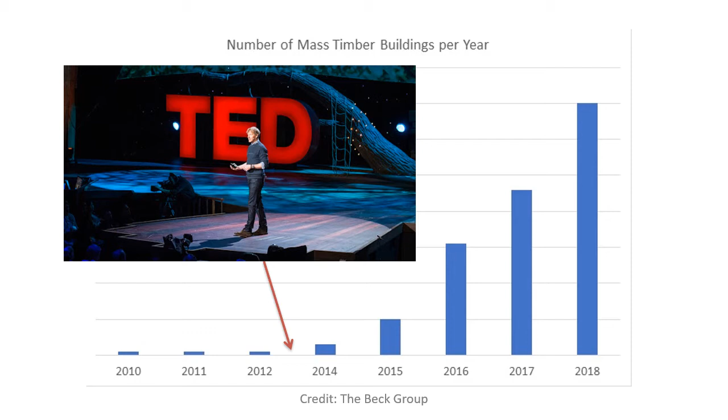Mass timber has been all over the headlines in recent years, and it's not just in design and construction journals either. As a matter of fact, I gave a similar presentation to the structural engineers in Utah in February, and on my way home, on one of my favorite NPR programs, Science Friday, featured mass timber buildings. That one's worth listening to if you get a chance.

The first and most visible reason why people are considering mass timber is the aesthetic. Mass timber has a sort of architectural warmth, or biophilia. Biophilia is the idea that humans possess an innate tendency to seek connection with nature and other forms of life. This seeks to explain why we're drawn to these environments.

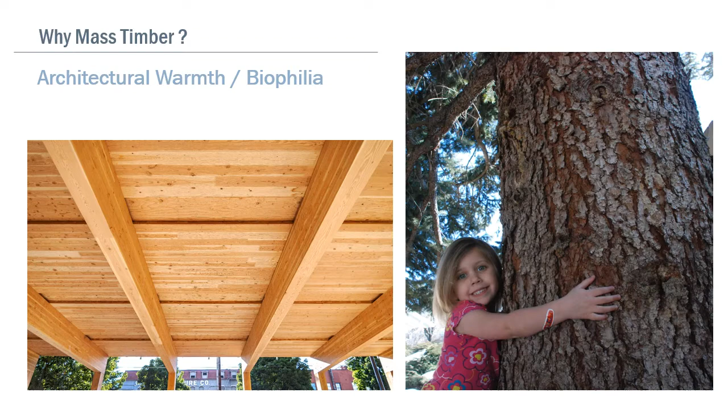For one recent project that we completed, called the Rocky Mountain Institute Innovation Center in Basalt, Colorado, the owner had a vision that this building will create delight when entered, health and productivity when occupied, and regret when departed. To me, this is an inspiring statement, and mass timber was a big part of achieving that goal for that project.

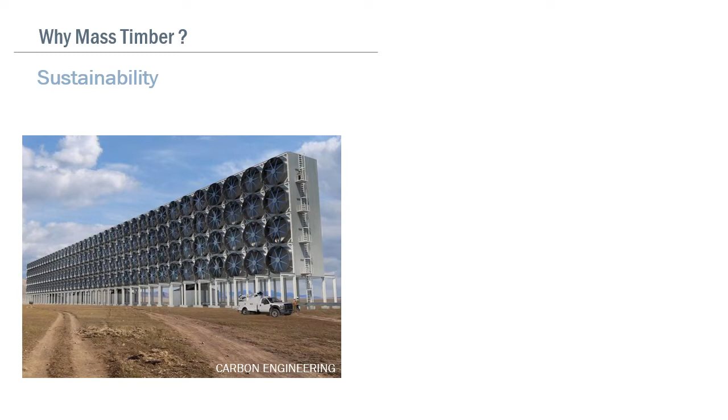Climate scientists have been warning us for decades that too much carbon dioxide in the air will cause global warming. One solution proposed by a company in Canada called Carbon Engineering is a large-scale carbon dioxide removal plant. The image that you see here is a rendering of one of those proposed plants. It turns out that Mother Nature has been creating machines like these for millions of years. They're called trees.

Carbon captured in sustainably harvested trees may be stored or sequestered in our buildings, so it cannot be released back into the air as the tree decays or from wildfires.

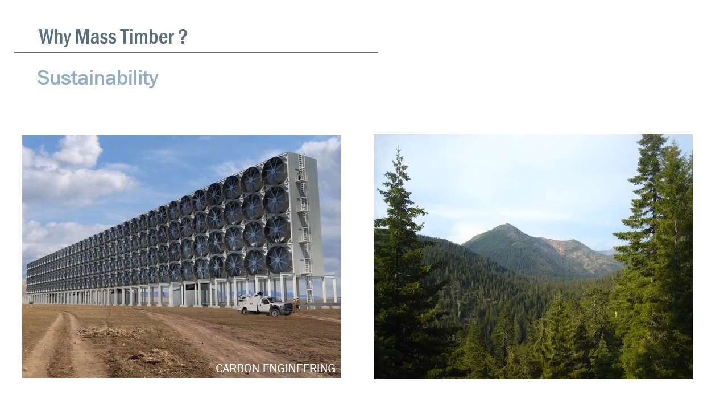Borrowed from the concept of farm to table, mass timber is providing opportunity for rural economic development and connecting the rural economies to the progress of our cities. This is especially true in the Northwest. Similar to the term farm to table, Lever Architecture, one of our partners on some of these projects, has coined the term forest to frame. In addition, in Utah, responsible forest management also has the opportunity to reduce fire risk in our backcountry.

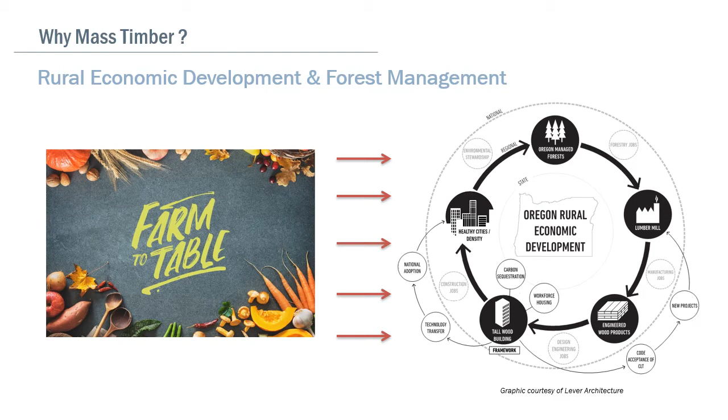One of the last reasons why mass timber is such a hot trend right now is the speed of erection. Mass timber components are prefabricated and CNC'd to allow them to go together really fast.

One example of what's possible is the Brock Commons in British Columbia. This 18-story mass timber student housing project was the tallest mass timber building in the world until recently. Constructed in 2017, the timber floors were erected with a crew of 9. The concrete core and podium took 7 months to construct, and the timber portion was erected in only 2 months. There's a really cool video that shows the time lapse of the construction—Google Brock Commons time lapse. It's really cool to see this in action.

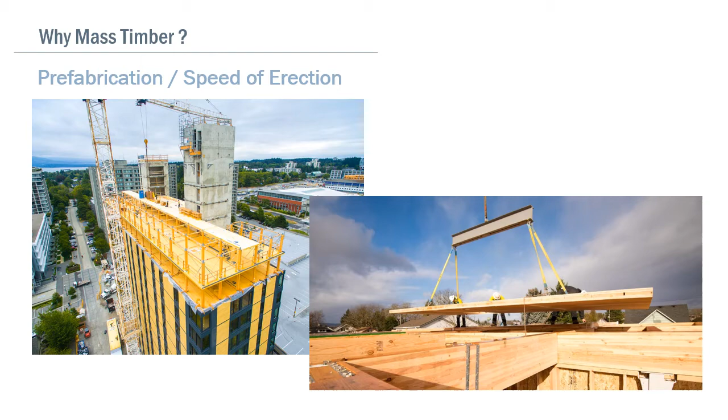So, what is mass timber? Mass timber is not your parents' or even your grandparents' timber construction. Current mass timber is more aligned with the way your great-grandparents built with wood. Up until the middle of the 20th century, many buildings in our cities were constructed with heavy timber post and beam construction. One example of this type of construction is the hardware building on North Temple that you see there on the right.

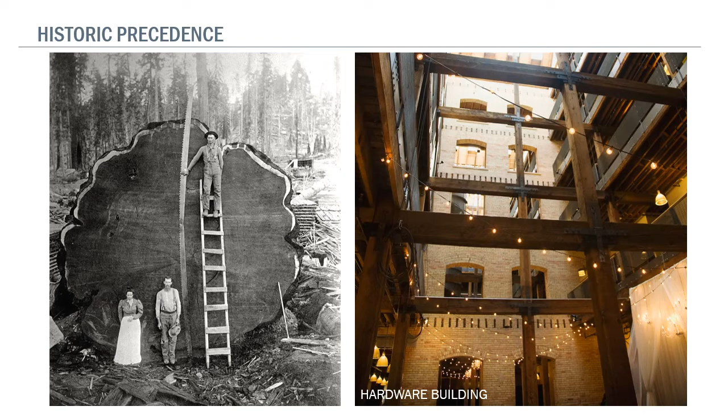Mass timber is not stick frame. It's not a commodity product, and it's not something that you'll go pick up at Home Depot.

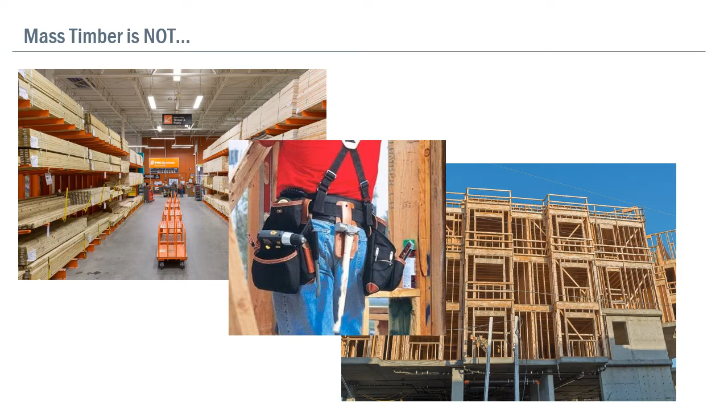Unlike heavy timber buildings in the early 20th century, today's mass timber is not created from old growth, large timbers. Today, the new generation of mass timber buildings are made up from building up large sections with smaller laminations. This allows for more sustainable forestry and procurement of timber.

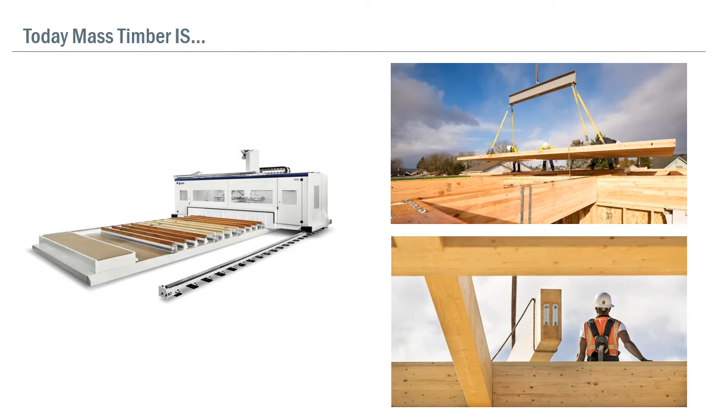Today's mass timber is also highly prefabricated. The image on the left is a CNC machine. Elements are cut, dapped, drilled, routed for connections, and site construction is often more of an assembly of a kit of parts that are delivered to the site.

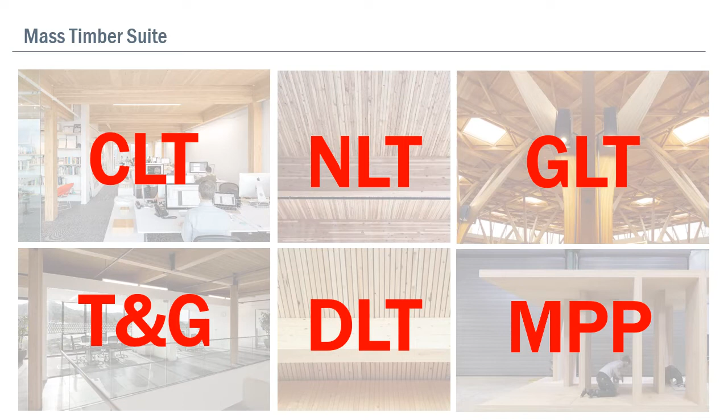There are a few products that have contributed to the mass timber renaissance. Starting in the upper left is CLT, or cross-laminated timber. To the right of that is NLT, or nail laminated timber. GLT is glue laminated timber. T&G is tongue and groove—you're all familiar with that, I'm sure. DLT is dowel laminated timber. And the bottom right is MPP, or mass plywood panel.

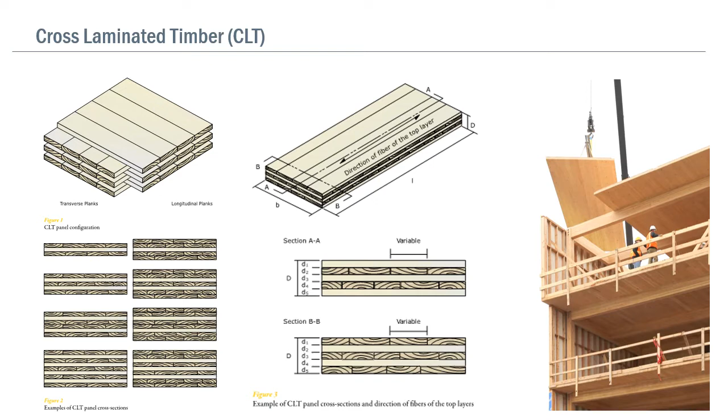Cross-laminated timber, or CLT, was first developed in Germany and Austria in the early 1990s. It's essentially like gluing up glue lam beams, but rather than stacking the laminations in the same direction to create a beam, the laminations are laid up in alternating directions to create large panels. Because CLT is fabricated in alternating layers, it is capable of two-way spans and can also be used as a structural diaphragm or shear wall.

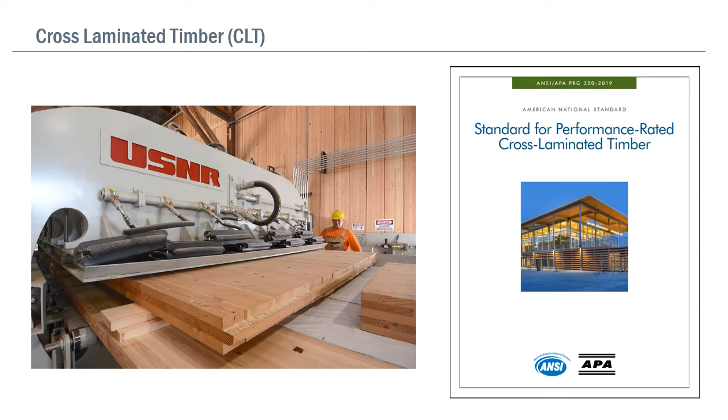NLT is essentially dimensional lumber stacked together and nailed on end. Because all of the lumber spans in the same direction, this is really only capable of a one-way span and cannot be used as a diaphragm.

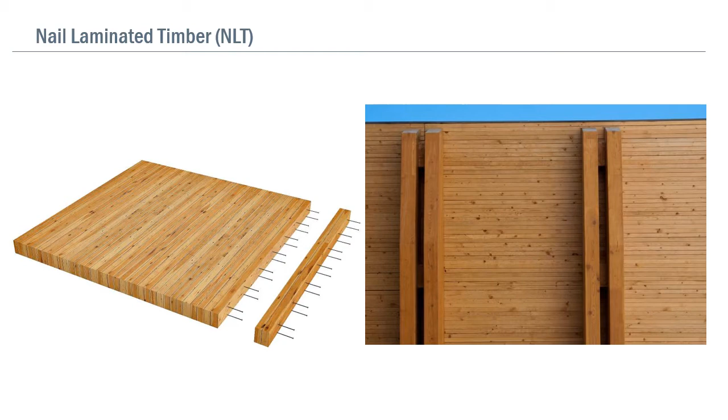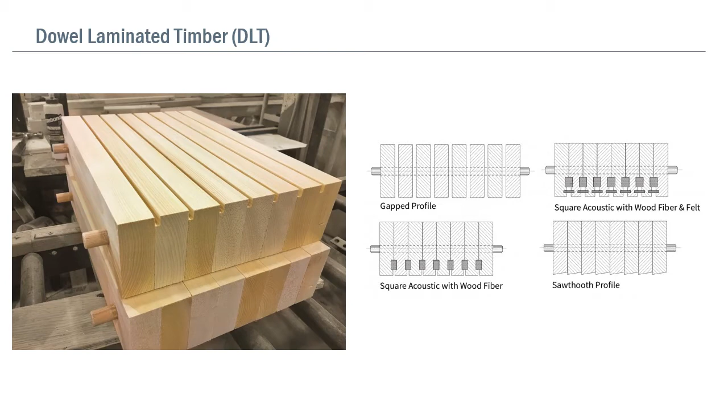An improvement upon the NLT concept is this product called dowel laminated timber, or DLT. It's essentially the same concept, except rather than nails, the laminations are connected together with hardwood dowels. When the hardwood dowels come into contact with the surrounding softwood lumber, they swell and lock these timbers together. DLT is primarily fabricated by one manufacturer in North America, StructureCraft, out of British Columbia. The edges of these can be routed or curved for aesthetics, or even to provide an acoustical treatment.

The last product that I'll mention of the mass timber suite is mass plywood panel, and they're exactly what they sound like—essentially a really thick plywood, up to 12 inches. MPP is fabricated by one mill in Oregon called Freres Lumber, and they began fabricating mass plywood panel in 2017.

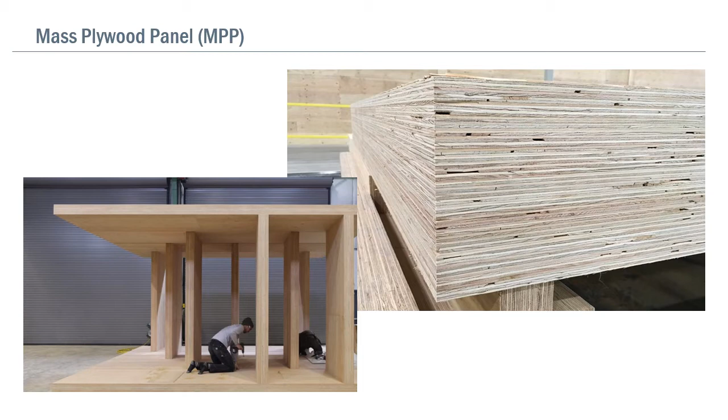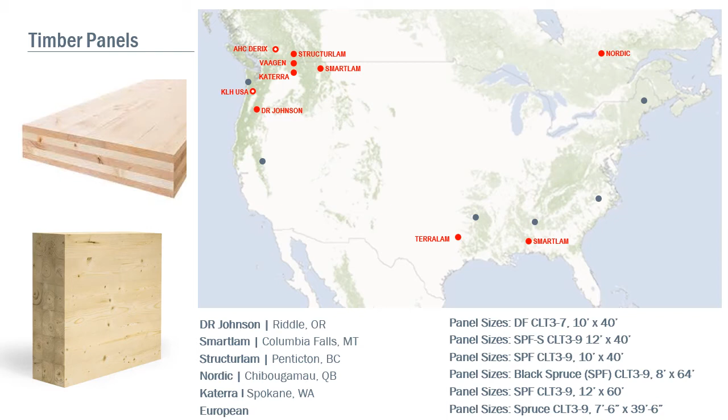Structurlam was the first CLT manufacturer in North America, located in British Columbia. In 2016, D.R. Johnson became the first domestic CLT manufacturer in the United States. In the 4 years since, many CLT manufacturers have opened up, and there's many more in the works. You may also run into European CLT—these manufacturers have distribution centers in North America. One thing to be aware of is that each of these manufacturers fabricate different panel widths, lengths, and thicknesses, so it's important to coordinate your design with them.

As I mentioned, StructureCraft in British Columbia fabricates dowel laminated timber, and Freres Lumber in Oregon fabricates mass plywood panel.

Wood is different than any other building material. We'll discuss a few of the design considerations and how they are addressed in timber construction and design. First, it's important to understand that wood on a microscopic level is basically like a bundle of straws or tubes that are bound together. This gives timber very different properties in the direction along its grain versus perpendicular to its grain.

Some practical implications of the fact that timber is strong in the direction parallel to its grain, and not so much perpendicular to its grain: when we design and detail timber buildings, we do so in a way that takes advantage of the strong direction and mitigates its weak direction.

Wood shrinks and swells as moisture content changes over time. The grain structure of wood shrinks and swells across the grain of the tree, and not so much along the length of the tree.

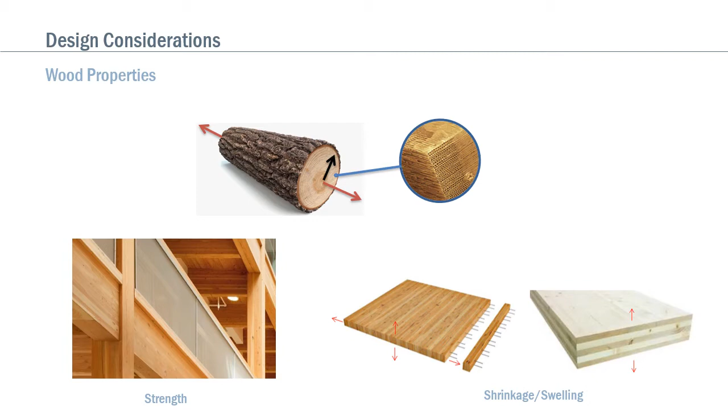This brings up one of the big differences between CLT and DLT or NLT. DLT and NLT will shrink and swell in their thickness and also in their width. CLT, on the other hand, is dimensionally stable, meaning it will shrink or swell in its thickness, but not in its width or length. This is because CLT panels are laid up in alternating directions, so shrinkage in width is restrained by the adjacent laminations that are in the perpendicular direction.

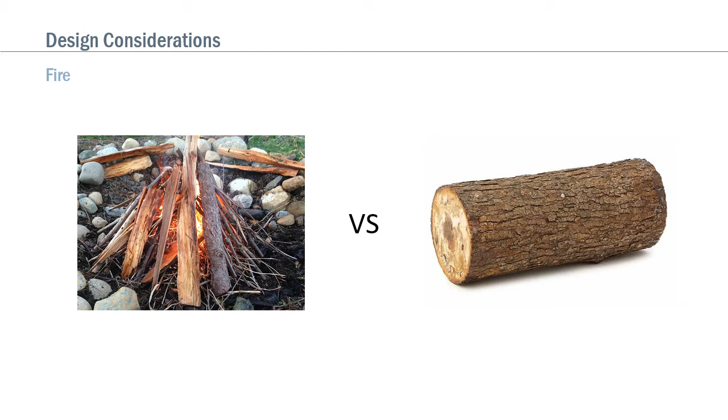Fire is probably the primary reason why we've stopped building tall buildings out of wood. For anyone who has built a fire, you understand that small kindling burns very differently than big logs. The IBC recognizes that heavy timber Type 4 building accomplishes fire rating assemblies in very different ways than steel.

In steel buildings, we typically protect the steel with spray-applied fire-resistant materials like Monokote. In heavy timber, however, fire rating is accomplished through a char layer on the wood beam. It turns out that large timbers char at a very predictable rate, and we can account for this char layer in the design of these mass timber elements.

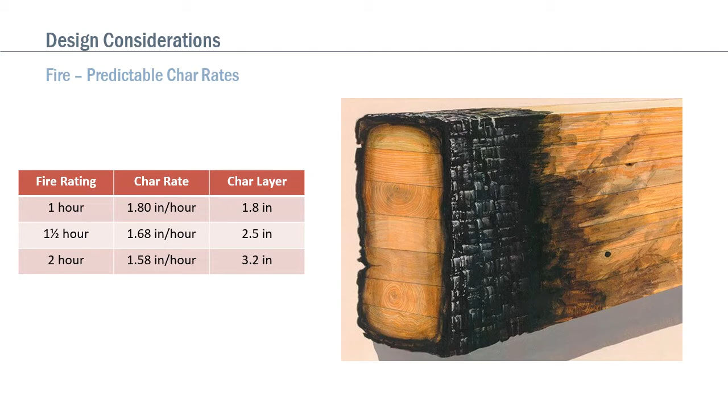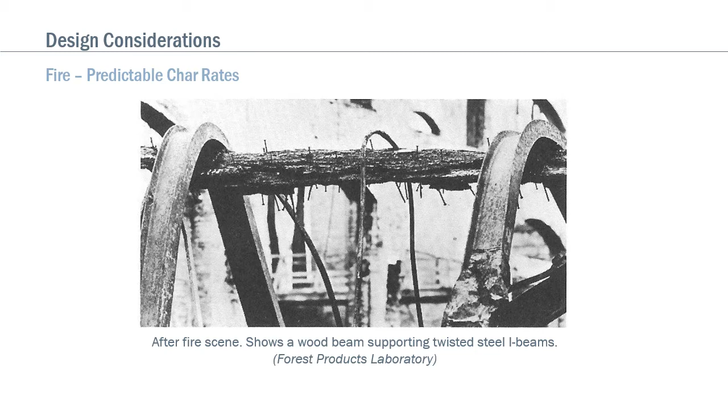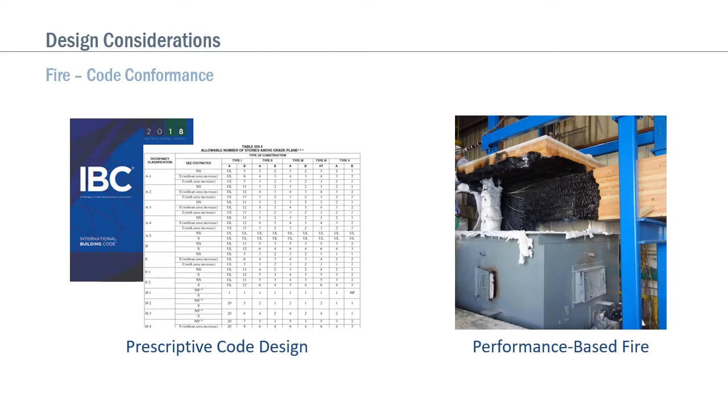With mass timber, it's important to understand limitations. The IBC contains prescriptive requirements for area, height, and fire ratings of assemblies. However, sometimes when we're on the cutting edge of building science, we have to step outside the prescriptive code and into performance-based fire modeling and physical testing. I'll show you a few examples of this from previous projects later in this presentation.

Advancements in timber connections and the ability to CNC members to receive these connections is another driver behind allowing us to go bigger and taller with timber.

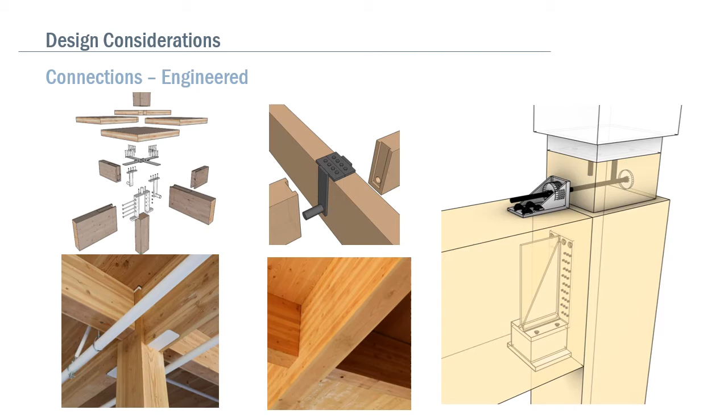There are some really innovative products out there for timber-to-timber connections. Some of the names here might seem a little foreign, and that's because they are. Many of the most innovative connections come out of Europe because they're at least two decades ahead of us in terms of mass timber construction and connections.

Inclined screws, tight-fitting pins, self-drilling dowels, epoxy, and concealed connectors shown here are just some examples of the different ways of thinking about connecting timber components.

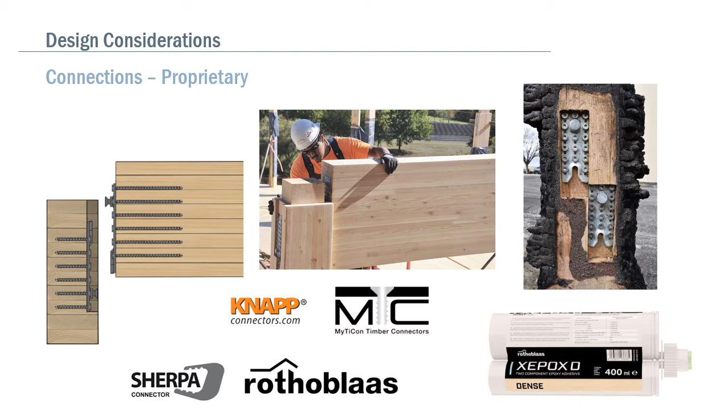On a side note, the image on the top right is from a fire test with one of these concealed connectors. You can see that the way we oftentimes protect the steel connectors, whether we're talking about an engineered connector or a proprietary connector, from fire is with a char layer of wood surrounding the connection.

Similar to steel buildings, when you design mass timber buildings for just strength and deflection, that can oftentimes result in bouncy floors.

KPFF and Woodworks were recently awarded a USDA innovation grant to study vibration in mass timber buildings. The end result will be a design guide for mitigating floor vibrations in mass timber buildings.

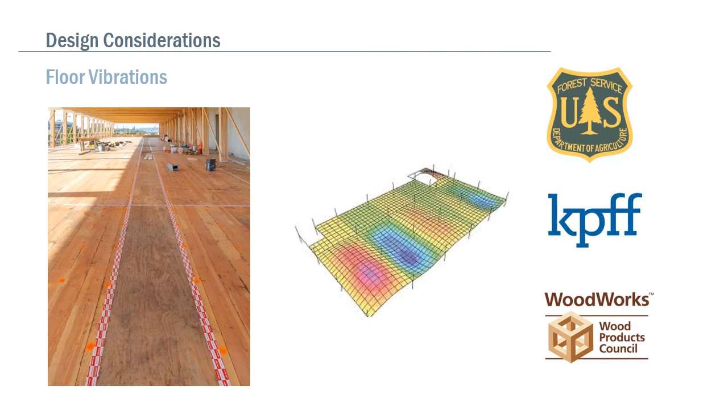To take advantage of biophilic design of timber structures, floors and beams above are oftentimes exposed to view. One consequence of this is that the acoustics can be a challenge.

This is especially true when dealing with multifamily housing. The IBC has a minimum sound transmission class, or STC rating, and also an impact insulation class, or IIC rating, of 50 for multifamily housing.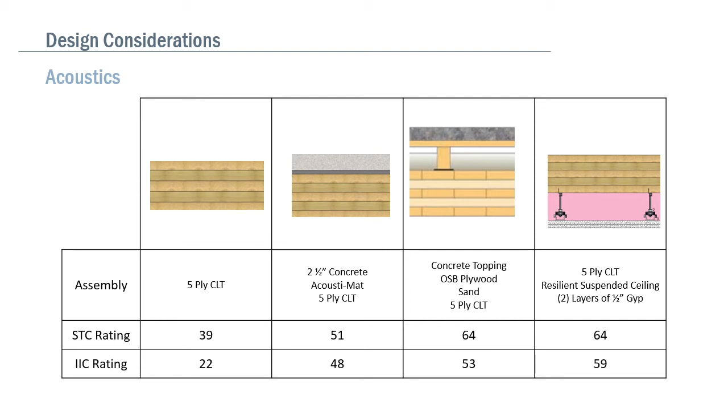This can be accomplished with a concrete topping above an Acousti-Mat over the CLT floor, as shown in the second column here. Sometimes, however, owners want to improve on this code minimum, especially in high-end or multifamily housing projects. We're working right now on a project in Ketchum where our client wanted to get to an STC rating of 60. This was accomplished with a built-up floor system over the CLT, as you see in the third column.

Two questions that inevitably get asked when contractors are brought on board in a new market: who fabricates and assembles these products, and who will erect the building on site. In more mature markets, this has been resolved a few different ways. One is the turnkey mass timber sub, essentially a subcontractor that supplies, fabricates, and installs the whole timber package. The second way is some contractors have seen an opportunity to self-perform the timber package, similar to the way many do with concrete.

Although supply chain and local knowledge can be a challenge right now in this region, this is quickly becoming a non-issue as suppliers and turnkey subcontractors react to market demand. In this region, Red Built has reacted to this demand by developing relationships with SmartLam and Timberworks out of Ogden to supply, fabricate, and install the entire timber package, and we're working with them right now on a few projects.

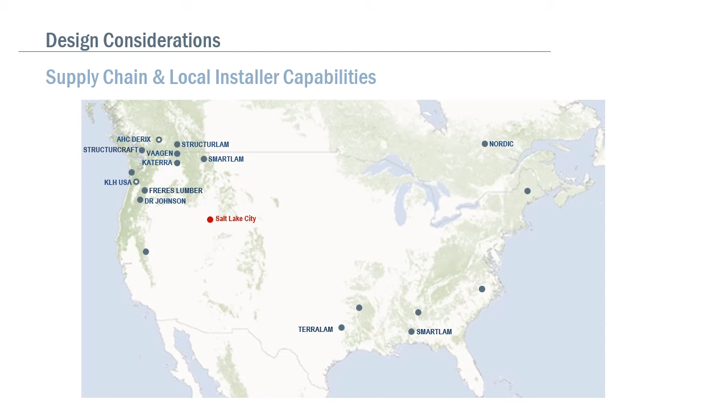And then along these same lines is the cost of the structure. This is pricing we've obtained from product suppliers and turnkey installers on some recent projects. We're seeing ranges of $43 to $48 a square foot for the timber structure. As you might be asking yourself, this is quite a bit more compared to comparative steel buildings.

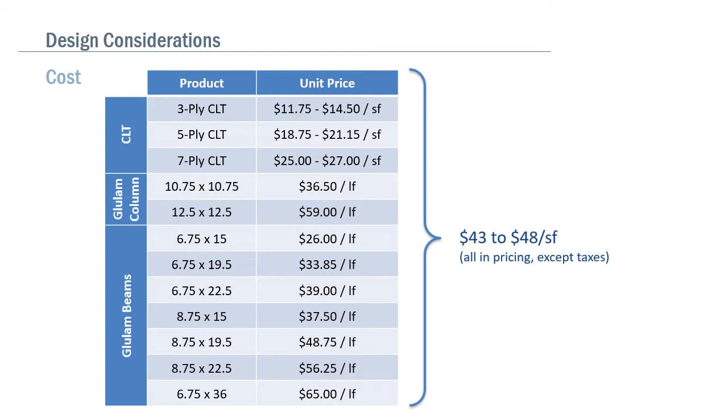But a few considerations might make that a bit more competitive for timber. The first ones are reduction in finishes, reduced foundations because of weight, speed of erection, and therefore reduced GCs and GRs. As mass timber becomes more widely known and understood in this region, I believe we'll see these costs come down and be even more cost competitive with concrete and steel buildings.

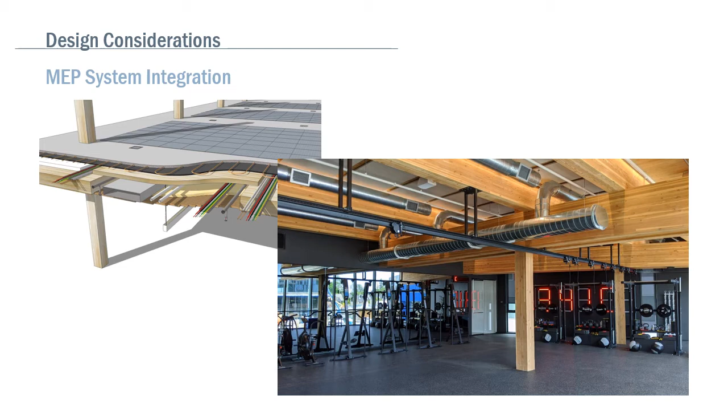Given that timber ceilings are often fully exposed, and with the amount of prefabrication that goes into these buildings, thoughtful integration of MEP systems is crucial to the success of these projects. Early collaboration between the design team, MEP subs, and timber subcontractors is essential.

These are not steel buildings, and therefore the typical 30 by 30 bay may be impractical. Here are some efficient bay spacings. Standard glulam beam with purlins - we're looking at more like a 20 by 20 bay for an efficient layout. For a CLT deck spanning to glulam girders, the bay size might be closer to 16 by 30.

With CLT, we can actually do two-way span slabs. The CLT is directly supported on the columns. The challenge is that you'll end up with a really tight forest of columns. We can get to the 30 by 30 bay with hybrid systems and prefabricated rib panels, and I'll show you a few examples of how we accomplish this later on the Adidas East Village expansion project.

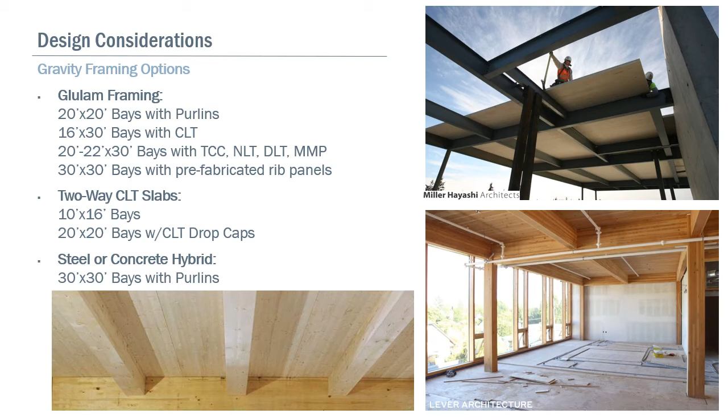And then the last design consideration I'll mention is there's currently no timber lateral force resisting system in the code. There are two approaches to lateral force resisting systems in mass timber buildings. The most common is a hybrid structure with a concrete core or steel braced frame, or even with a type 3 or 5 building, sometimes we'll do plywood shear walls.

The second option is performance-based seismic design. For lateral systems that are not codified, we have to use performance-based seismic design to confirm that the structure will meet or exceed the code performance in a seismic event. Research is underway right now to codify some of these mass timber lateral systems.

Platformed CLT shear walls will be codified, for example, in the 2024 IBC. And also of note, Dr. Pantelides at the University of Utah is doing testing and research right now on timber buckling restrained brace frames. So that will be cool.

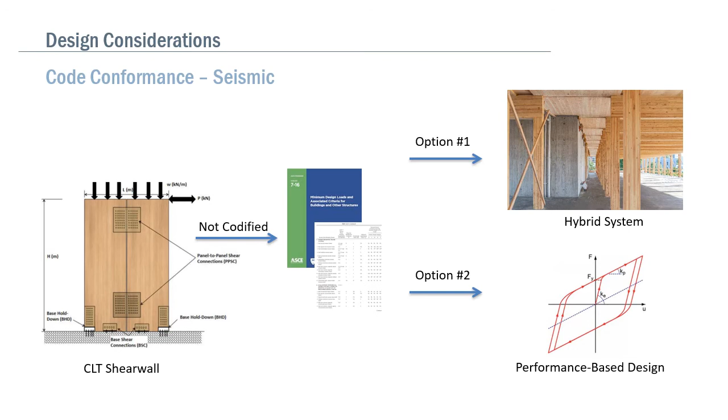As I mentioned earlier, the state of Utah has adopted tall wood building provisions into their construction code. Historically, mass timber buildings have been designed to a few different construction types. Mass timber buildings generally fall into type 3, type 4, and type 5 construction. With performance-based fire modeling, we've extended this to a type 1B equivalent, and I'll show you an example later in this presentation.

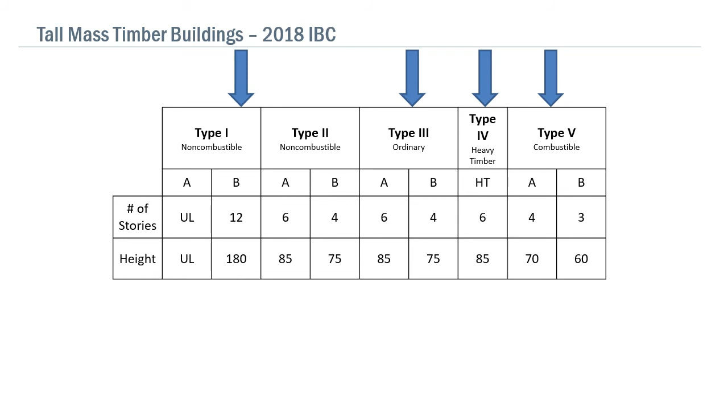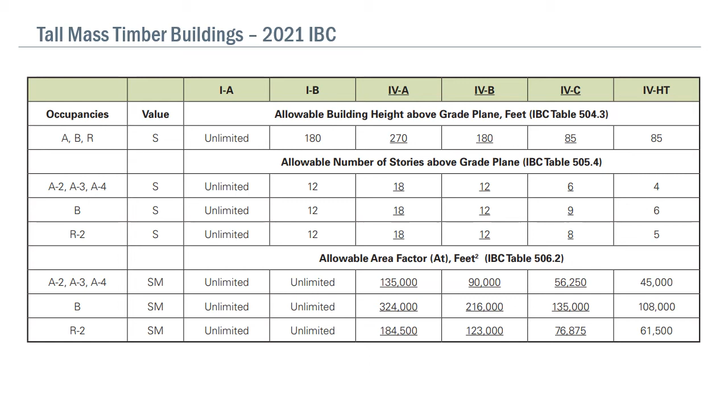So the 2021 IBC will introduce three new construction types: Type 4A, Type 4B, and Type 4C. Type 4 HT is the same as the regular Type 4 in previous versions of the code. Corresponding height, area, and story limits will be found in the code for each of these new construction types, given a specific occupancy.

So what the state of Utah has done with House Bill 54 is they've preemptively adopted these code provisions into the Utah Construction Code today. With this early adoption, however, they've amended the allowable heights for types 4A and 4B. I understand this amendment won't be carried over when the 2021 IBC code is adopted.

Note that all of the heights and area limits listed here are for sprinkled buildings. Non-sprinkled buildings are allowed in type 4A, B, and C, but they're all limited to 65 feet, and there are other limitations based on occupancy. So realistically, when we're talking about type 4A, B, and C, most likely your buildings are going to be sprinkled.

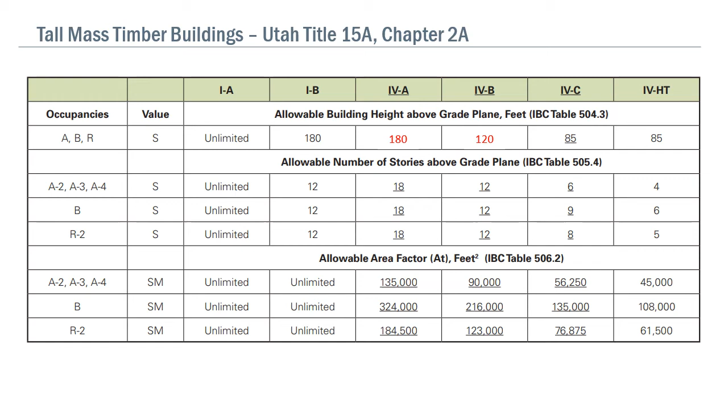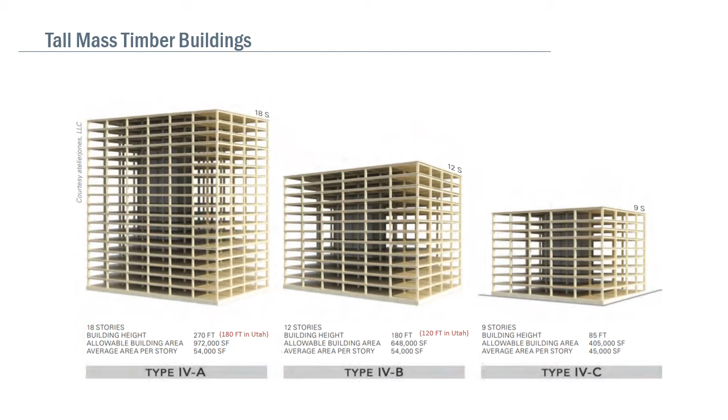Types 4A, 4B, and 4C all have different requirements for fire resistive ratings and prescriptive requirements for the amount of timber that can be exposed.

First off, type 4A is the least restrictive on height and area, but contains the most requirements for fire resistive rating and covering of mass timber. All timber in type 4A must be covered by a protective layer of non-combustible covering. Basically, all mass timber surfaces in a type 4A must be covered in a few layers of drywall. So if your main driver for considering mass timber is the architectural warmth and biophilia, type 4A isn't for you.

Some of the research that goes into type 4A comes from Brock Commons out of British Columbia. Although Brock Commons is a really cool case study in mass timber construction, the end product, as you see up there on the top right, looks a lot like any other high-rise housing building. All of the mass timber surfaces are covered in a few layers of drywall.

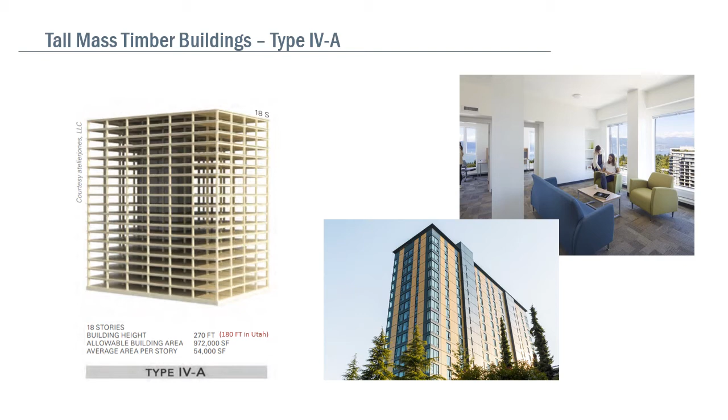So type 4B is the middle ground. These are allowed to go up to 12 stories, and up to 20% of the ceiling can be exposed. 40% of the wall timber may be exposed. And then there's an equation for combining walls and ceilings. There needs to be a 15-foot separation between exposed ceilings and exposed walls.

Again, if your main driver for considering mass timber is the architectural warmth and biophilia, type 4B may not be for you either. Type 4B is based on some of the research that went into the framework building in Portland, and this is one that we'll discuss later in this presentation.

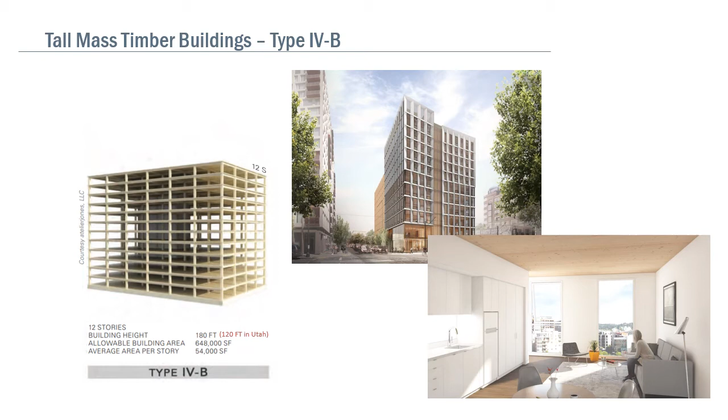Type 4C is the most restrictive in terms of height and area, but all the timber can be exposed. This is a classic mass timber that many designers have been excited about because of the potential for architectural warmth and to minimize finishes. With this type, you can go up to 9 stories or 85 feet above ground for B and R occupancies.

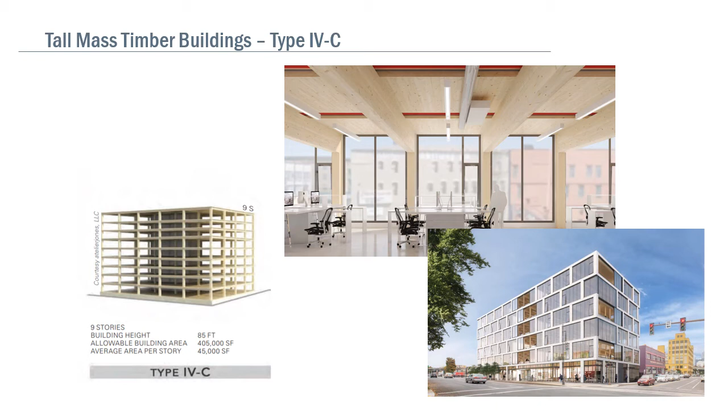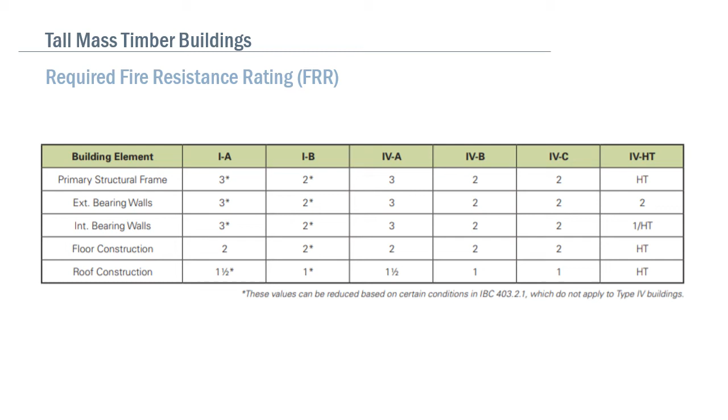Similar fire ratings are provided for components of the structure for these types of construction as they are for types 1, 2, and 3. One difference, however, with mass timber is the way the fire resistance rating is achieved. In mass timber buildings, fire resistance rating is a combination of the char rating of the mass timber and the fire resistive rating of the non-combustible layer that's applied to the surface.

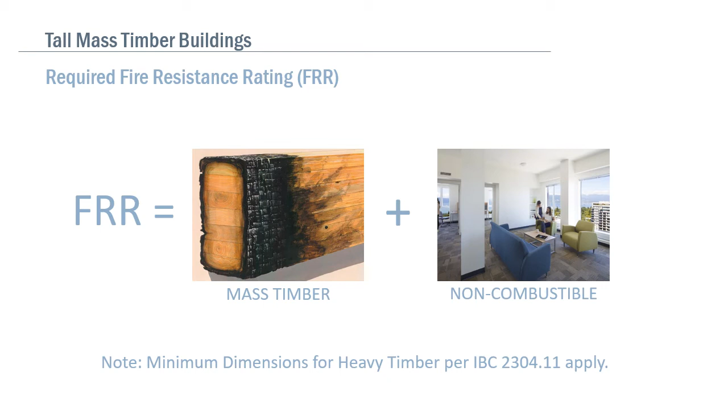However, fire resistive rating doesn't always need to be a combination of mass timber and non-combustible. In some cases, just the non-combustible layer can be used. In other cases, just mass timber can be used. Another thing to consider is that the minimum dimensions for heavy timber construction in Chapter 23 of the IBC apply to these new type 4A, 4B, and 4C construction.

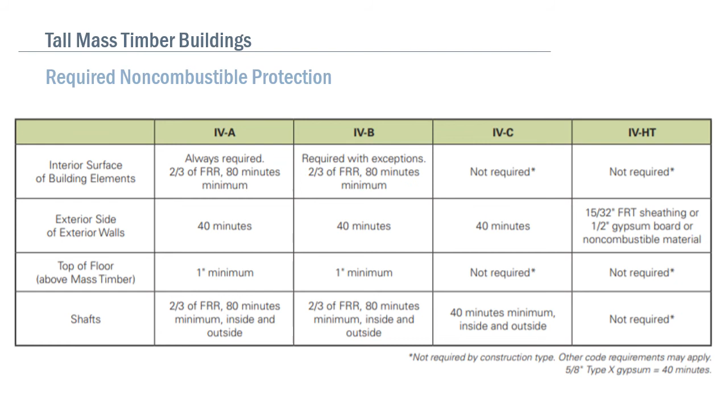For types 4A and 4B construction, a portion of the fire resistive rating must come from the non-combustible protection. This table here shows the requirements for the different types of construction. As an example, type 4B, the required fire resistive rating on a floor assembly is 2 hours.

Where the non-combustible protection is required, this can be accomplished in one of 2 ways. One is to provide 2 layers of 5/8 inch gypsum sheathing on the underside of the floor assembly, and then rely on 40 minutes for char rating on the mass timber. The second option is to provide 3 layers of gypsum sheathing on the mass timber element to accomplish the entire 2-hour rating.

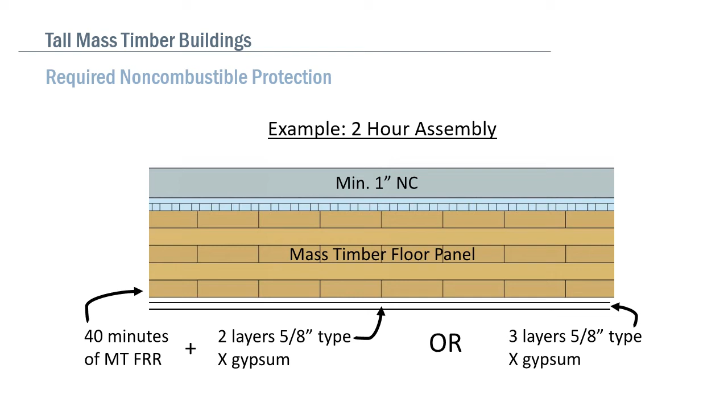The same is true for beams and other primary frame elements.

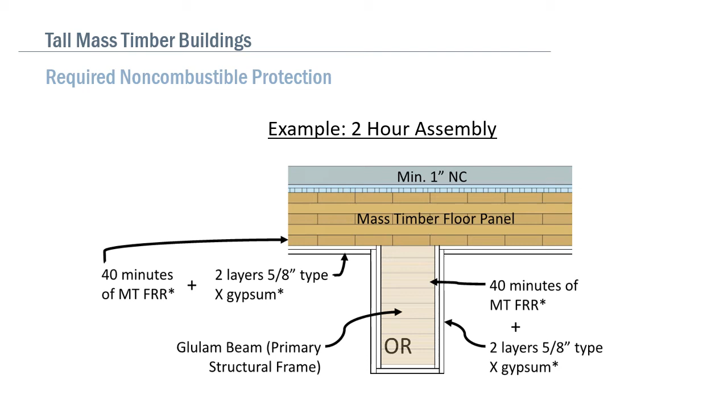The 2018 IBC and previous versions of the code disallowed concealed spaces in type 4 buildings altogether. The 2021 IBC allows concealed spaces if one of these 3 conditions are met. Option 1 is to provide sprinklers in the concealed space. Option 2 is to fill the concealed space with non-combustible insulation. And option 3 is to protect the exposed surface of the mass timber with a layer of drywall sheathing.

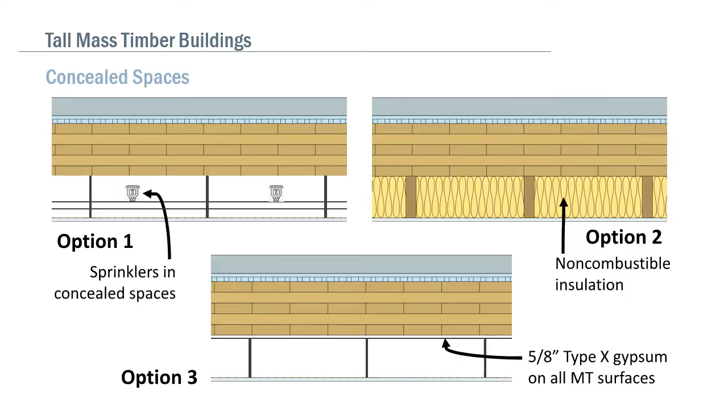Now we're going to show you a few examples of some mass timber projects that we have been involved with. I'm not going to go into any great amount of depth with any project specifically, but I'm going to highlight one or two unique or innovative things about each of the projects.

This is a map showing some of the mass timber projects that we've done throughout the United States. As you can see, the epicenter of the mass timber renaissance in the United States is in the Pacific Northwest. With our headquarters in Seattle and a really strong presence in the Northwest, we've been fortunate to be at the forefront of this emerging trend.

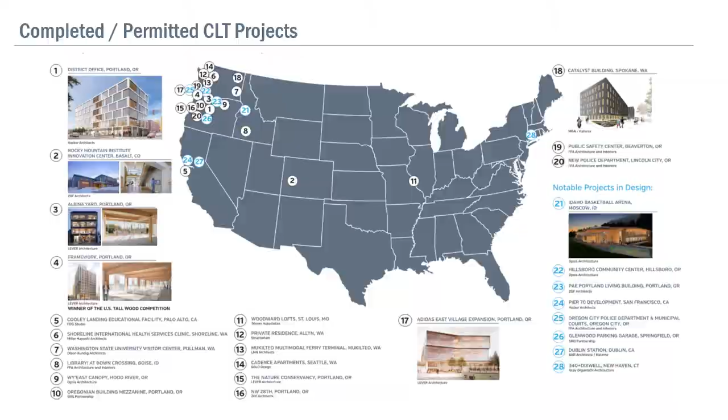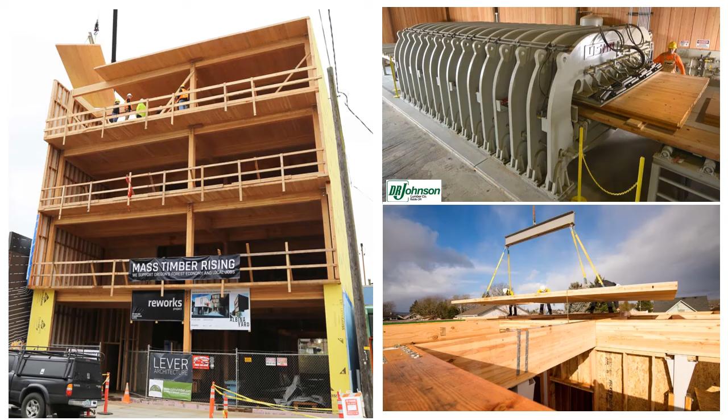So the first project that I'll talk about is the Albina Yard. This building consists of Type 5 construction, and the lateral system consists of plywood shear walls. This was the first project in the United States to use domestically sourced CLT. The press that you see in the top right corner is from D.R. Johnson's facility in Oregon. Another thing that was interesting about this project is it's in the middle of a neighborhood, and the comments from the neighbors was that this went up really fast and it was really quiet, not typical for a construction site.

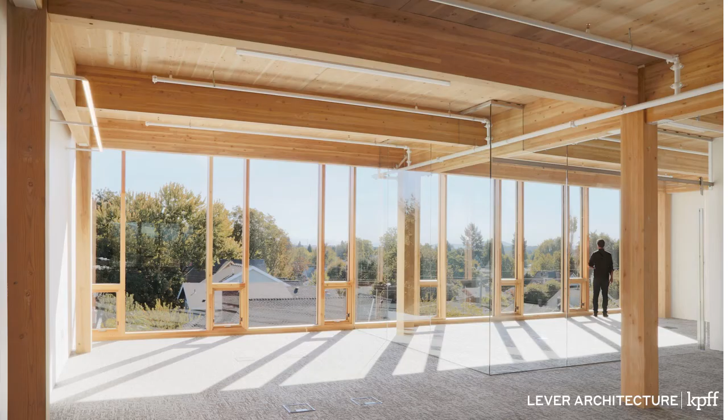And this is an interior view of the finished product. Wouldn't you love to have your office in this building?

So the design and construction of the Albina Yard project provided a proof of concept that was utilized in the design of another mass timber building called Framework. At 12 stories, this framework was to be the tallest mass timber building in the United States. Framework was ahead of its time and well outside the prescriptive building code at the time.

So the project team had to be able to justify equivalence using performance-based fire and performance-based seismic design. This project was the winner of the Tall Wood Building Prize competition, which provided $1.5 million in research and development to develop innovative solutions for high-rise mass timber buildings. As I mentioned, the research that went into the design of Framework fed directly into what's now Type 4B construction. There was so much research and physical testing that went into this building, but I'm going to talk specifically about two unique considerations.

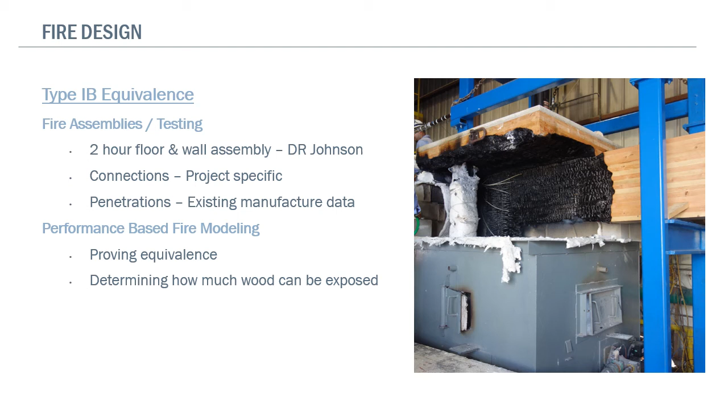When building tall wood buildings, one of the first things that comes to mind is fire safety. Since we stepped outside the prescriptive code requirements, we had to be able to justify code conformance. The goal on this project from the outset was to justify Type 1B equivalence in a mass timber building. The team accomplished this through a combination of physical testing of the joints and performance-based fire modeling. This also helped the team understand how much of the wood could be exposed in this building.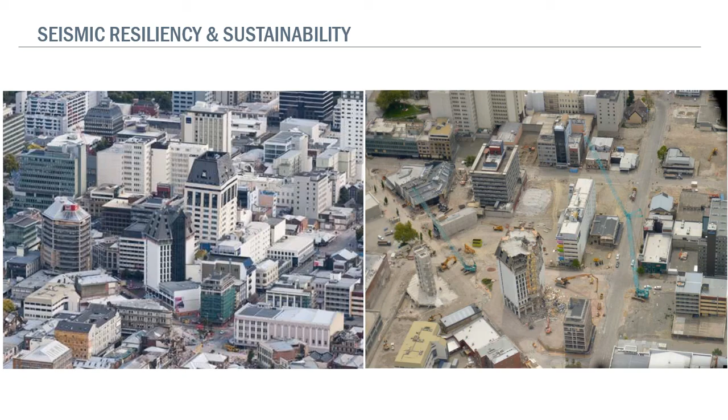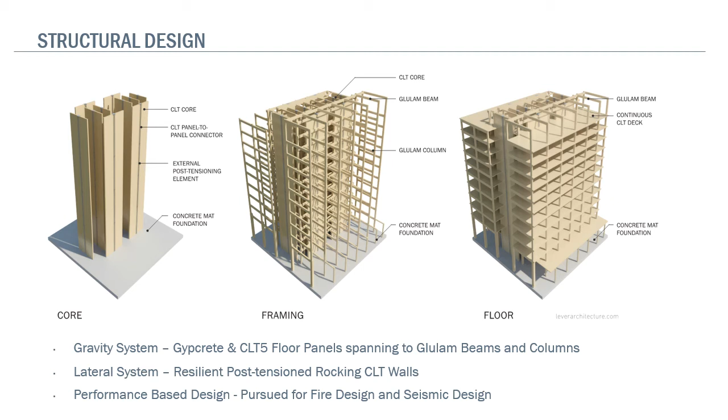So for this project, the team was tasked with two goals for the seismic design: one was to build with mass timber, and the other was to design a seismically resilient system that not only protects life safety but also can expedite post-disaster recovery. For this building, we had to invent a seismic force resisting system that hadn't been done before. The system on this project consists of CLT cores, as you see there on the left, and then the gravity frame and the floor panels in the two other images.

These shear wall cores aren't fixed at the base. They're allowed to rock up and down. They're called rocking cross-laminated timber walls, or rocking CLT walls. A post-tensioning cable running down the middle keeps the walls from tipping over when the ground moves.

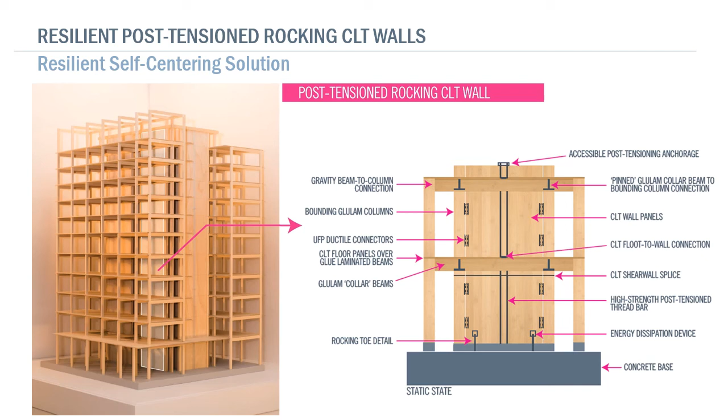When these walls rock up and down, they engage special plates at panel edges. These steel plates are bent into a U shape. All of the damage from the earthquake is concentrated into these U-shaped flexural plates, which dissipate the energy from the building movement. These U-shaped flexural plates can then be removed and replaced after the earthquake, which allows the building to resume functionality more quickly. In this way, these elements behave much like fuses in an electrical system.

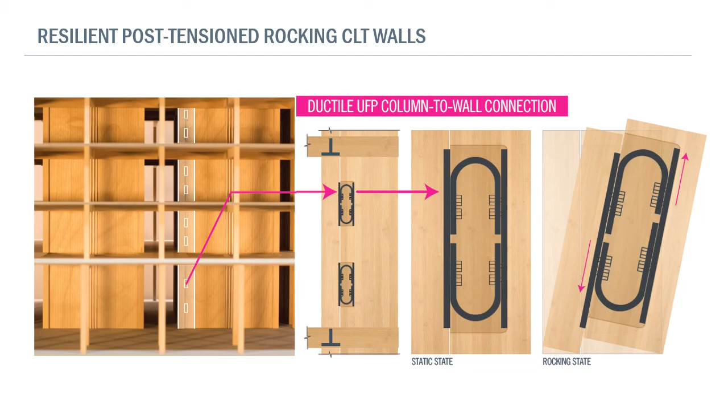Another project that we recently completed in Portland is called the District Office.

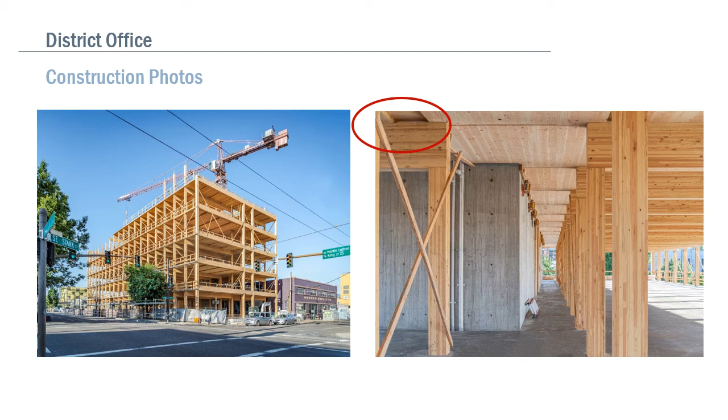This project was designed as Type 3A construction with all the timber exposed. This is a hybrid mass timber and concrete core structure. You can see that the surrounding core was left open for mechanical distribution systems. Also, the CLT was laid out in a way that left space between the CLT panels and the top of the beam for conduit and pipe routing above the glue-lams.

The University of Idaho basketball arena is a 4,200-seat arena in Moscow, Idaho. The roof and mezzanine level are constructed with glue-lam beams and columns. The roof is constructed with 1 1/8 inch plywood, and the mezzanine level floor consists of dowel laminated timber, all of which meet the requirements for Type 4 HT construction.

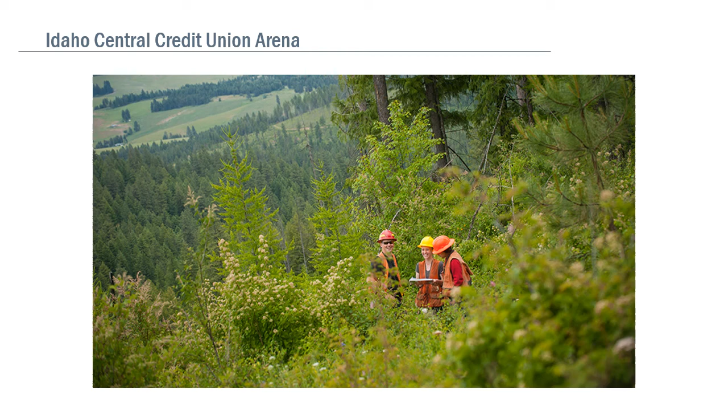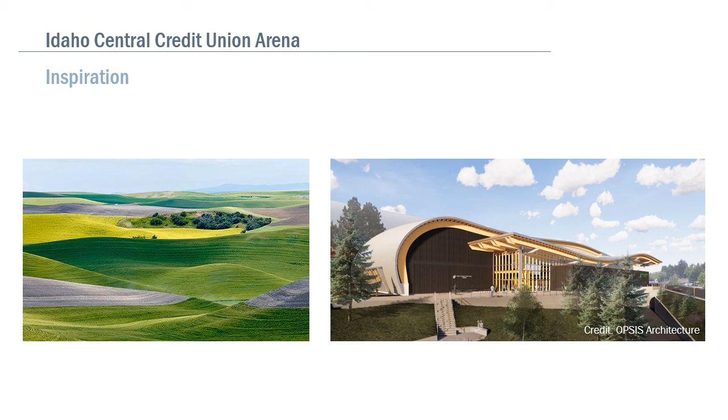The main driver for this project using mass timber was the desire of the university to showcase Idaho wood products. The University of Idaho has a thriving forestry program, and they maintain an 8,500-acre forest to the south near McCall, Idaho. The inspiration for the shape of the roof was the rolling hills of the Palouse in the Moscow-Pullman area.

The gentle slope of the roof presented us with an engineering challenge. Wood is really strong if you can make it into an arch, but the shape of this roof didn't allow us to take much advantage of arching action. The 150-foot span of the roof is accomplished with king post trusses. These trusses consist of steel rod bottom chords with glue-lam top chords connected with steel struts in the middle.

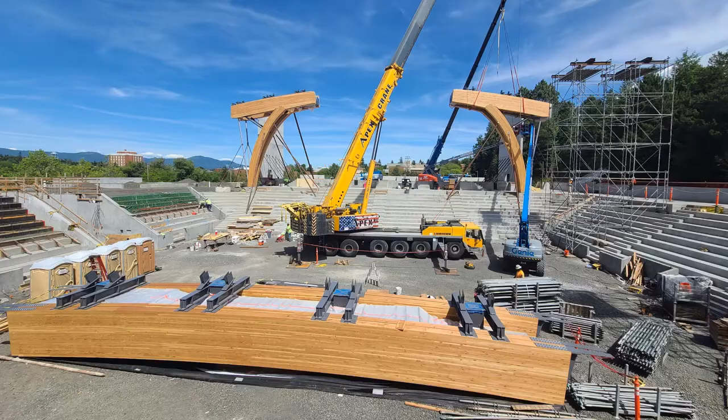The portal frame on the left supports half of the roof with 4 glulam beams, each about 6 foot deep. Here's a recent construction photo of the portal frame. The beam in the foreground is the last keystone beam that will complete the portal frame. The picture gives you an idea of the scale when compared to the size of the outhouses on the left.

Another thing to note is the effort that went into the mechanical coordination. The main duct trunk line that provides air to the entire arena was pre-installed in the portal frame with stub-ups between the king post support struts on top of the beam to branch out and feed the whole arena. This project is scheduled to complete in September of 2021, just in time for the basketball season.

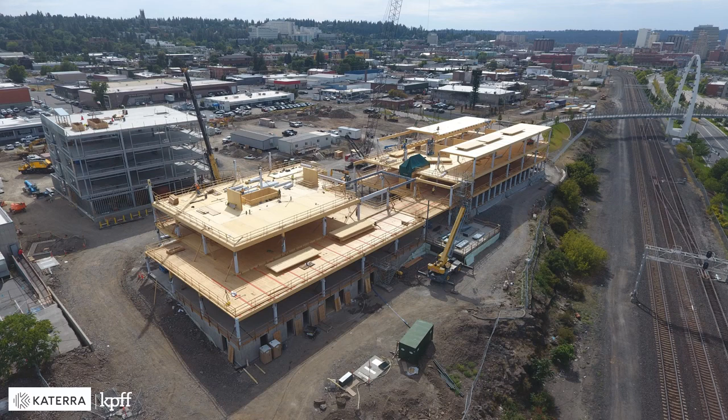About 80 miles north of the University of Idaho basketball arena is the Catalyst project in Spokane, Washington. KPFF collaborated with Katerra on this project, which is also nearing completion. Katerra is very interested in pushing the AEC industry towards prefabrication and lean design and construction. As such, they've made a big bet on CLT and actually opened up a CLT fabrication plant in Spokane, which provided the cross-laminated timber for this building.

One of the innovative things that came out of this project was the lateral system, which was the first of its kind. Having just opened their CLT fabrication plant, Katerra was very much interested in keeping as much of the building to be CLT as possible. CLT shear walls are very strong and stiff, but they're not very ductile, which is an important characteristic when we design buildings for earthquakes. To enhance the ductility of this CLT shear wall, we introduced buckling restrained braces as the hold downs for the shear walls.

Given that this was the first of its kind, we had to go through component testing at Oregon State University and utilize performance-based seismic design to justify the design.

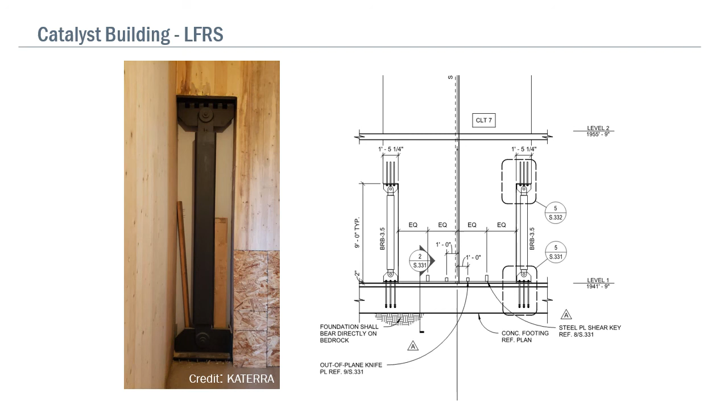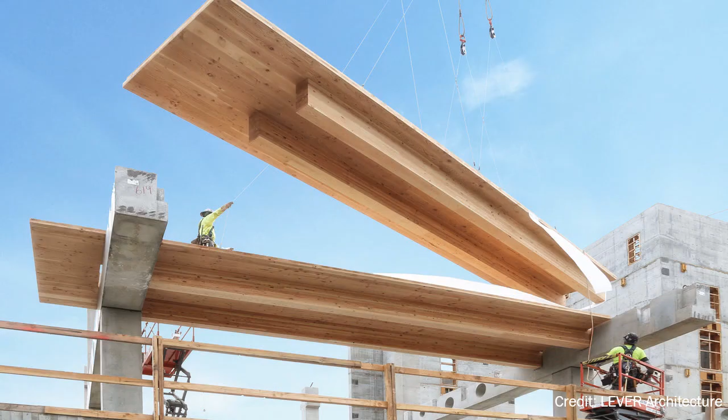The last project that I'll mention as a case study was the Adidas East Village expansion project in Portland. This actually consists of two separate buildings, both of which are constructed of mass timber. The one you see in this image is the north building, which is a precast mass timber hybrid. The mass timber double T panels span to the precast concrete girders and columns.

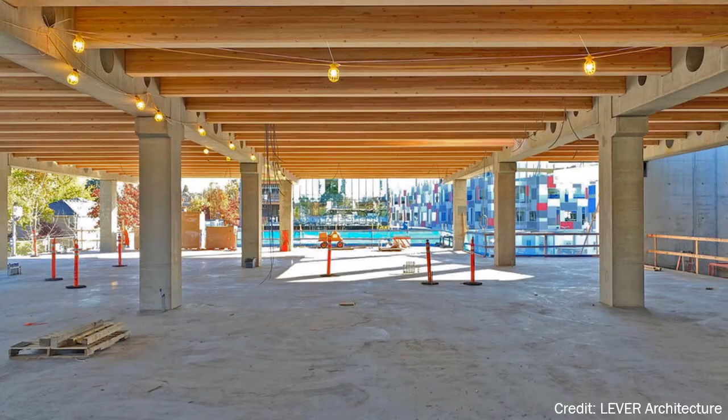With this precast mass timber double T hybrid, we were able to accomplish a wider, larger 30 by 30 bay span and keep the appearance of the timber. I love how the timber and the precast concrete complement one another in this project. You can also see in this picture that the precast girders have been cast with openings to accommodate mechanical distribution systems.

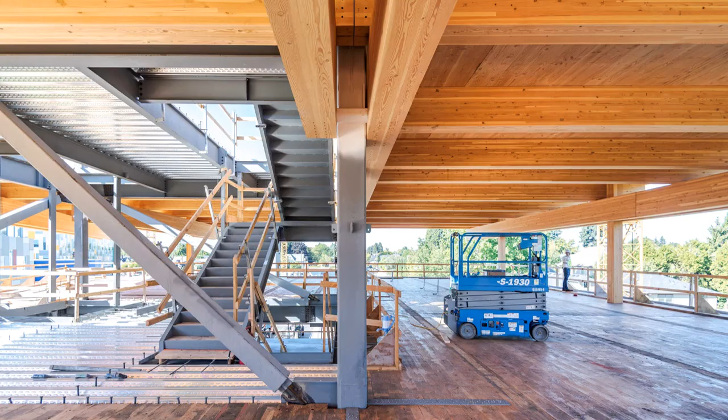As I mentioned, the south building on the Adidas East Village expansion project was also constructed with mass timber. This was constructed atop an existing parking garage, and the lighter material allowed for this addition with fewer upgrades to the parking structure below. Steel buckling restrained braces are provided at the center core as a steel mass timber hybrid structure.